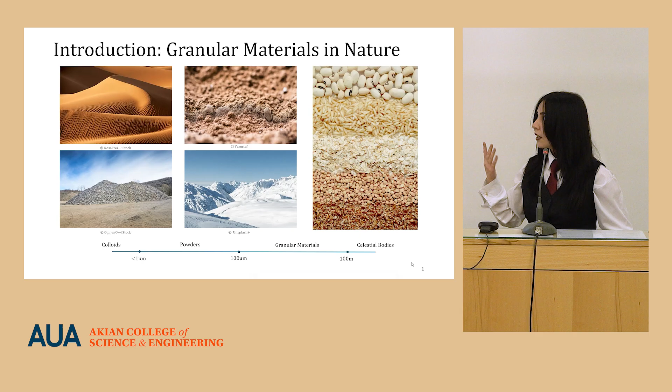So granular materials, as a type of material, have a few very unique properties. One of them is their material state. Unlike other types of materials, granular materials don't have a defined state of matter; their state of matter depends on the conditions. So, for example, when you're standing on a beach and compressing the sand with your feet, the sand will act like a solid and will not flow and will support your weight.

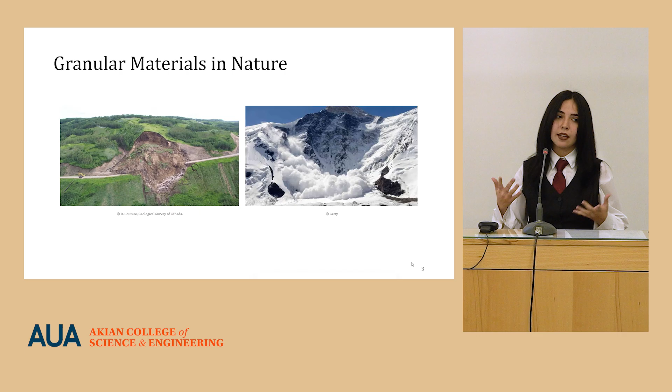However, when a bulk of granular material is tilted to a certain angle known as the angle of repose, it starts flowing like liquid. And when highly agitated, for example, during a sandstorm, granular materials will behave like gases. Granular materials are very interesting and important to study in nature to understand different natural phenomena such as landslides and avalanches, and understanding their unique behavior will allow us to predict such natural cataclysms and maybe be more prepared for them.

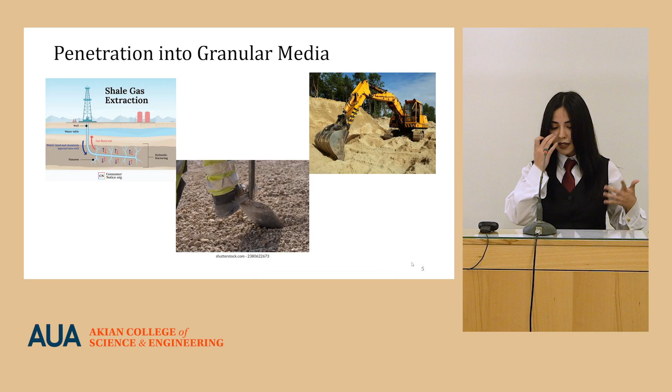Granular materials are also very common in the industrial sector. In fact, they make up around 70% of the industrial feedstock, and their applications range from construction and agriculture to food production and the pharmaceutical industry. In different industrial processes, granular materials often are subjected to different penetrative events, for example, during fracking or excavation or construction, and this penetration will cause another very unique and defining property of granular materials, which is known as force chains.

Because of the random packing, different particle shapes and sizes within a granular bulk and the various contact points between the particles, forces within a granular bulk will have preferred paths of distribution, which are known as force chains. These figures depict force chains during impact loading and static loading.

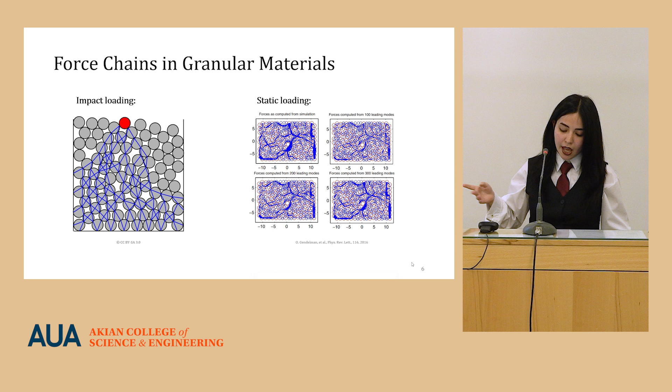So, as you can see, granular materials have many different unique properties, and throughout the years, many methods have been developed to study those properties, which can broadly be categorized into experimental, analytical, and numerical methods. Experimental methods seek to quantify the behavior of granular materials through physical experimentation. Analytical methods seek to construct constitutive models to describe the behavior of granular materials, and numerical methods combine experimental data with constitutive models to simulate the behavior of a granular bulk.

But the most important test for our study is the penetration test, which involves driving a probe of different shapes, usually cones or wedges or plates, into a bulk of granular material, either in a lab setting or in situ, with either a defined force or a constant velocity, and measuring respectively either the depth of penetration or velocity of penetration, or the reactive force acting on the load cell of the testing machine.

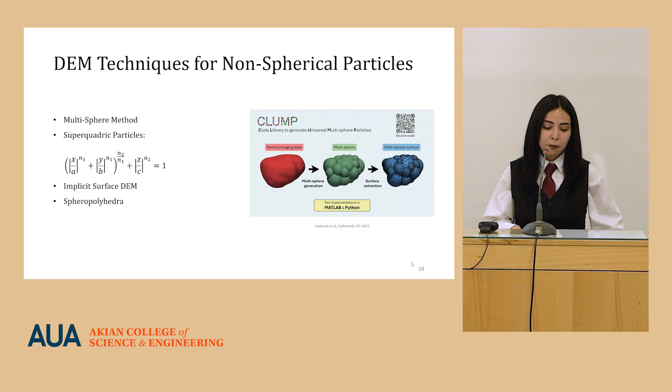So the purpose of our study is to gather experimental data for granular material penetration tests on different particle shapes, and be able to extrapolate our data to a random polyhedral mesh of a particle, and be able to construct a model, a DEM model, to simulate the behavior of random polyhedral pack of granular materials.

So the initial shapes that we considered were spheres, a clump of two spheres, a clump of four spheres arranged in a tetrahedral shape, a tetrahedron, and a more or less random polyhedral particle. However, due to time constraints and manufacturing difficulties, we settled on experimenting only on spherical, four-sphere and tetrahedral particles, because these already constitute a wide range of polyhedral granular material shapes.

The particles were modeled on SolidWorks and manufactured through fused deposition modeling, which is a type of 3D printing, using PLA thermoplastic filament. This filament was chosen because it is very easy to work with, and the material properties, we wanted them to be constant across all particle shapes. Some of the properties are listed here, and also some of the particle properties that we measured, the average mass of particles and average density, are also listed in this table.

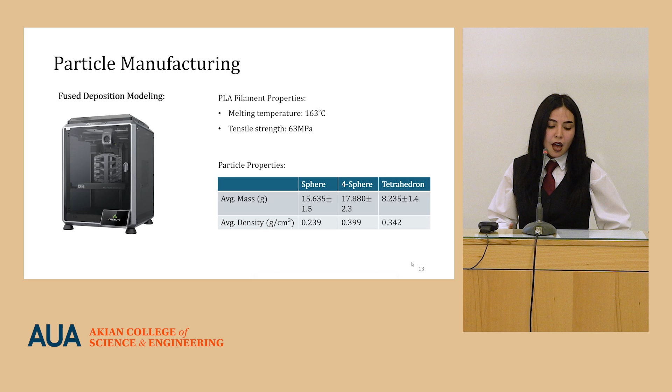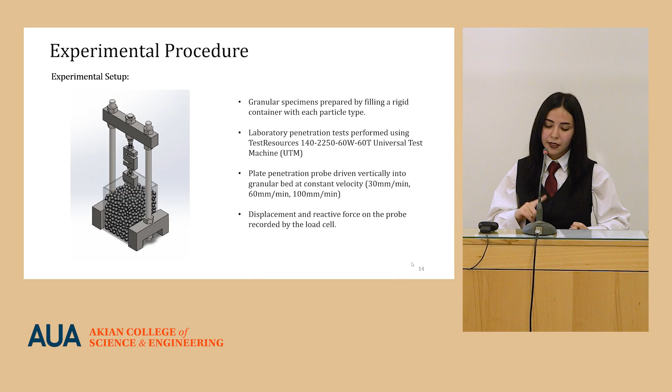So our experimental setup involved using a universal test machine, filling a rigid container with each shape of granular material, and driving a plate-shaped probe into the bulk of the granular material, and the load cell of the machine recorded the reactive forces on the plate. We chose the method of constant velocity, and performed the penetration tests at 30 millimeters per minute, 60 millimeters per minute, and 100 millimeters per minute.

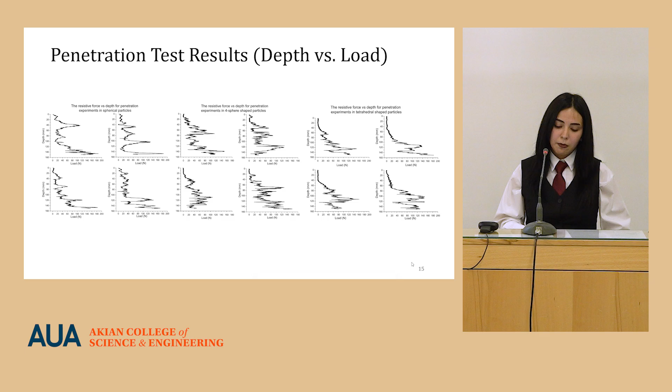And these are our test results. Some of the penetration tests were plotted here, and you can see there are many fluctuations in the graphs. These occur due to the local collapses in the material, and this is expected in a granular penetration. To be able to quantify these results, we calculated the mean force of penetration against the depth of penetration and the coefficient of variation against the depth of penetration.

So the mean force will, in all three shapes, show a bimodal nature. So there is a first peak and then a trough and then a second peak. However, in spherical particles, it is way more defined, which indicates strong formations of force chains, and at the bottom of the material, as you can see, the force spike at the end is very steep. For tetrahedral particles, there's also a bimodal nature, but the peaks occur at different depths, mostly at mid-range and later. And this is due to the interlocking and randomness of the contacts. And the four-sphere is more of a transitional shape between the spheres and the tetrahedra.

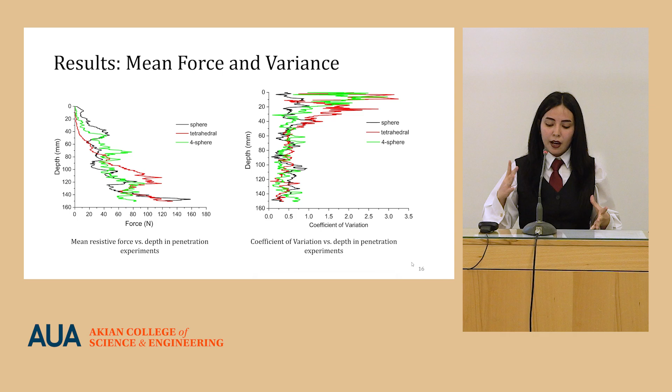And the coefficient of variation shows how repeatable the experiments are. The spheres have the least coefficient of variation because the initial packing of the spheres does not heavily influence its behavior. But for four-spheres and tetrahedra, at the very beginning the variation is very large. This is caused by the interlocking, the very random packing of the materials within the bulk. And actually, the large spikes are due to the fact that very small absolute differences between the penetration forces will cause a large relative variation. So these indicate that for four-spheres and tetrahedra, in the very beginning, the tests are very stochastic, very dependent on the initial randomness of the packing.

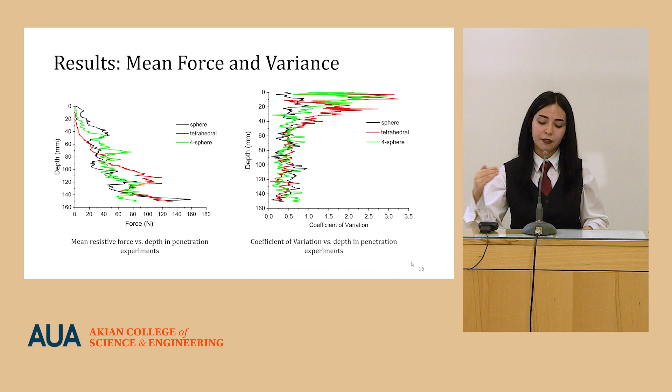However, starting from around 50 millimeters of depth, the variation settles, and it is mostly below 1 for all of the shapes. So the repeatability of the tests at these depths is way better.

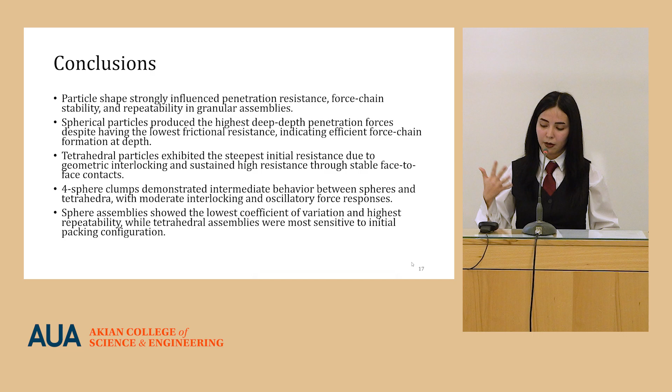So in conclusion, in our tests we saw that the force of penetration is highly influenced by the particle shapes, as well as the force chain formation and stability and the repeatability of the experiments. And the spherical particles produce the highest deep-depth penetration resistive forces, which indicates a very strong formation of force chains at deep depths. Four-sphere clumps demonstrated an intermediate behavior, and the tetrahedra showed the most randomness between the tests. And these results can be used to calibrate the DEM simulations and to verify if our model of contact laws is accurate or not.

And then we would also like to see if the packing density or the initial arrangements of the particles will influence the penetration response, and if we have the capacity, we would also like to perform the penetration test on other particle shapes and other particle sizes.

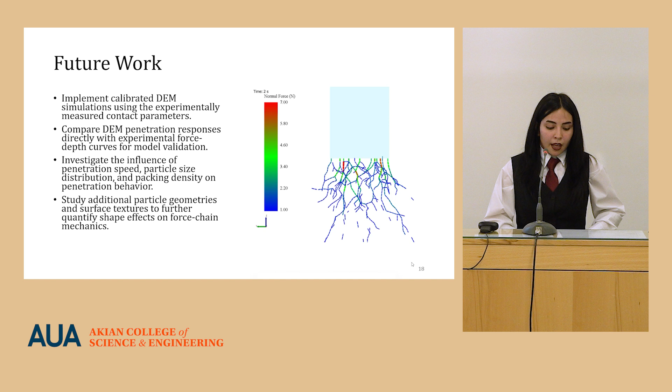I have a few comments in general on your work. You have done your experiments and mentioned the initial packing configuration. In fact, there are very simple steps to ensure uniformity of your initial packing configuration, and to ensure that you are doing your experiment in a controlled and uniform manner.

You could do either vibration compacting of your granular matter or pressure compacting, because these are two variations that you come across in nature. Micro earthquakes compact sands, etc., and the pressure of the overlying ground or rocks can also compact the granular matter which lies under them, and that probably refers to your future work.

And also you could do a little more work in terms of ensuring the size of your granules, that they are of similar size, by filtering or sieving them, passing them through different sieves. Press uniformly, and then force chains become much more predictable in that case. And then your experiments will become much cleaner.

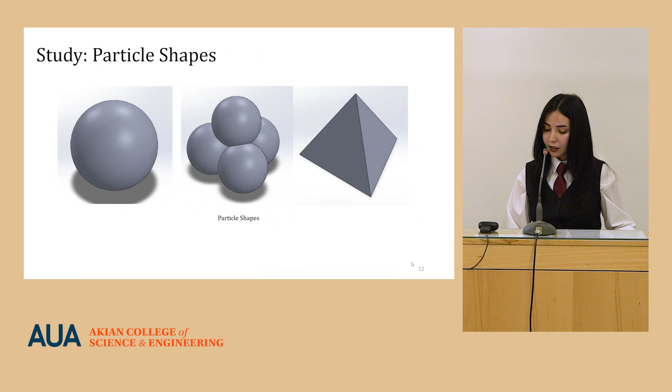What are the alternative methods? There are a few other numerical methods for studying granular materials, for example, the finite element method, smoothed particle hydrodynamics, and the material point method. But DEM is the most widely utilized method for studying force chains, and is more commonly performed in different literature.

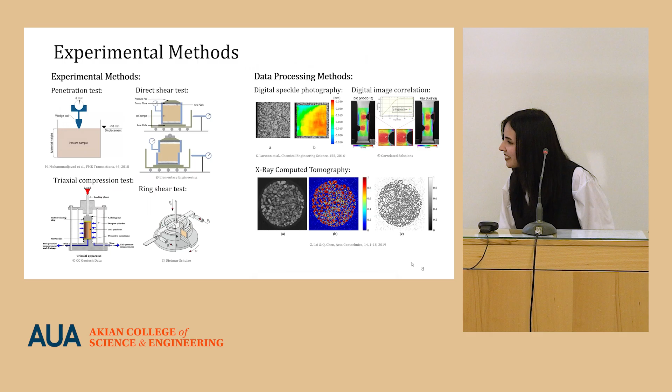Is there any statistical method? Because in this case, you are only working with a single particle, right? But the statistical information of the body is sort of lost. Sorry, I don't understand. So in this case, for DEM, discrete element methods, you are working with a single particle, right? Each individual particle is modeled with its individual contact points with other particles. What about the statistical information between the interconnection of them? I am not the expert here, I just wonder if there is any method that can help us understand the statistical features of the materials without diving into discrete elements.

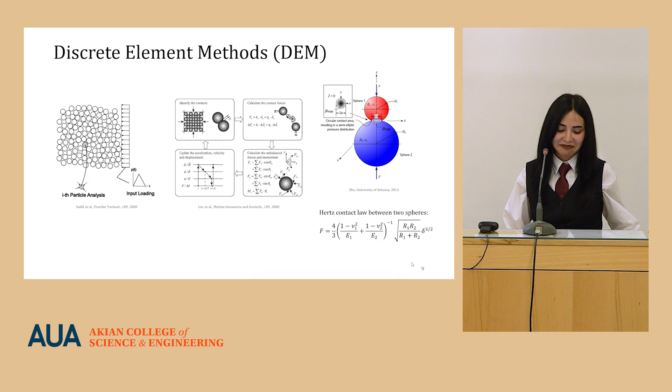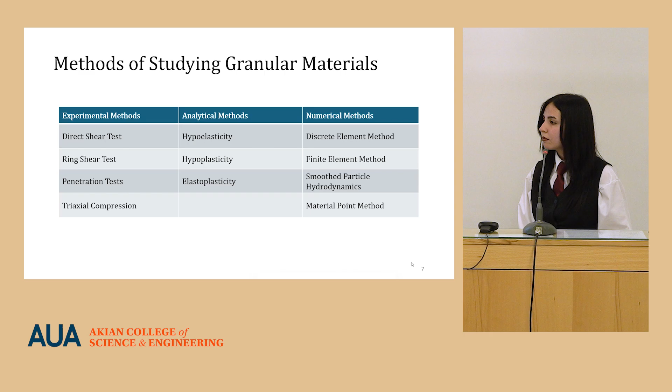Statistical? Do you mean a variety of types of particles within one batch? Like there might not only be spheres. If you are considering a single element, you are not taking into consideration humidity. All the statistical effects you are not considering, but the statistical distribution has an impact on the material analysis.

No, DEM can be performed for many different arrangements of granular particles, and not only for dry granular materials, but also for saturated granular materials. We only need to know the physical effects acting on individual particles, and DEM allows us to model their motion and the bulk behavior of the granular materials using different physical laws. Usually we consider the contact laws, but other physical constraints can also be put in the DEM simulations.

So as I understand, from an implementation point of view, the main interest should be in much smaller scale particles, right? I mean, your test elements are very large. Are the test results transferable to smaller size elements? Our goal is to understand if our contact model works for polyhedral particles, and testing on other particle shapes is part of our future goals for the study. So if we verify the law for larger particles, with some modifications, it can be extrapolated to particles of any size.